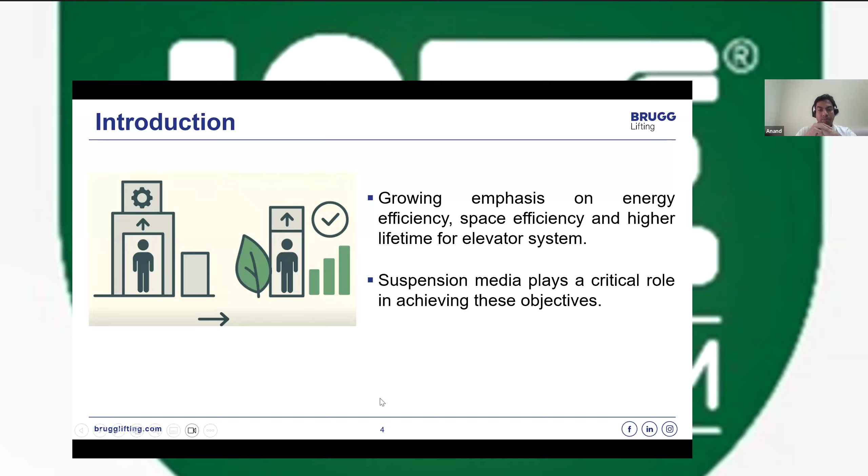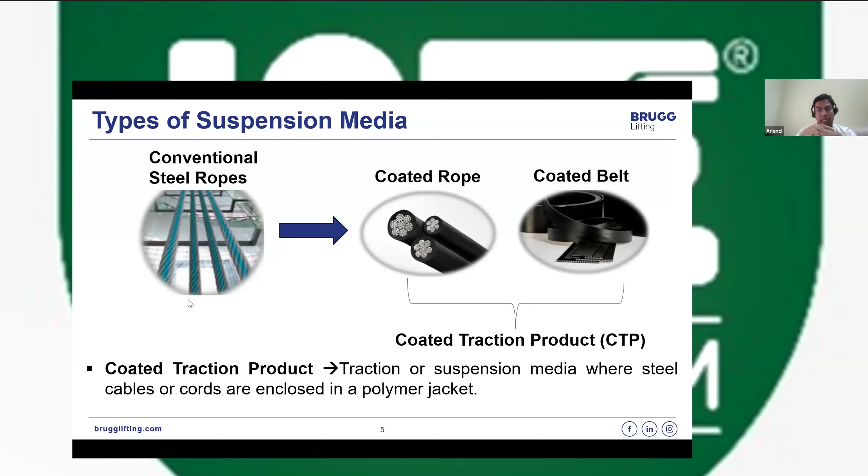We can move on to the next slide. Here you would see how the suspension media can optimize elevator performance. Look at the 2-to-1 typical elevator layout here. The traction sheave would also be a very important aspect to consider for the space required for the elevator. This traction sheave diameter is basically decided by the type of suspension media that we are using.

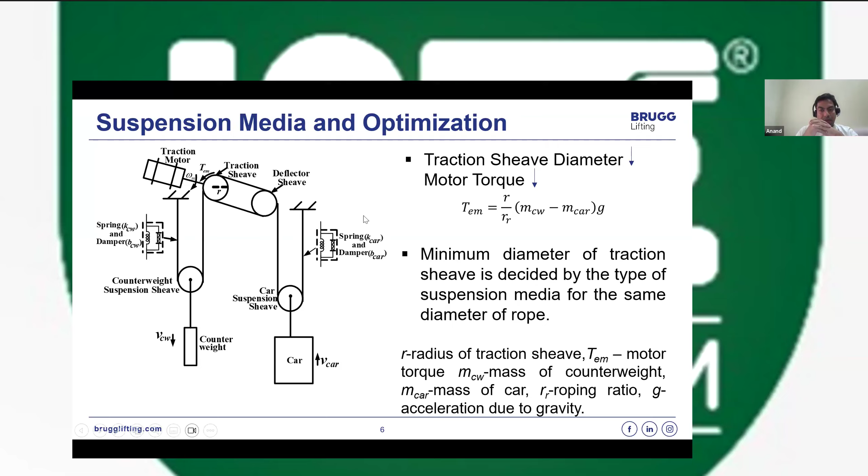So what are the advantages? Maybe we're directly jumping into this topic of the advantages of coated traction products.

As I said in the previous slide, the diameter of the traction sheave is basically decided by the suspension means that we are using. When you use the coated traction rope, we can go as low as 25 times the diameter of the steel rope inside the polymer jacket. In case of belts, it's 40 times the diameter of the steel cord inside the polymer jacket. So if you take a typical rope of 8mm, 40 times the diameter of the rope is what should be the diameter of your traction sheave. It's 40 times 8, so 320mm should be your diameter of the traction sheave.

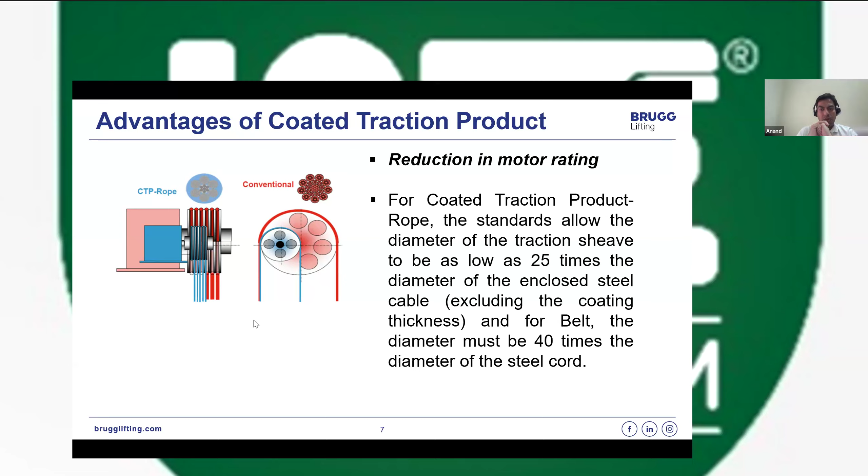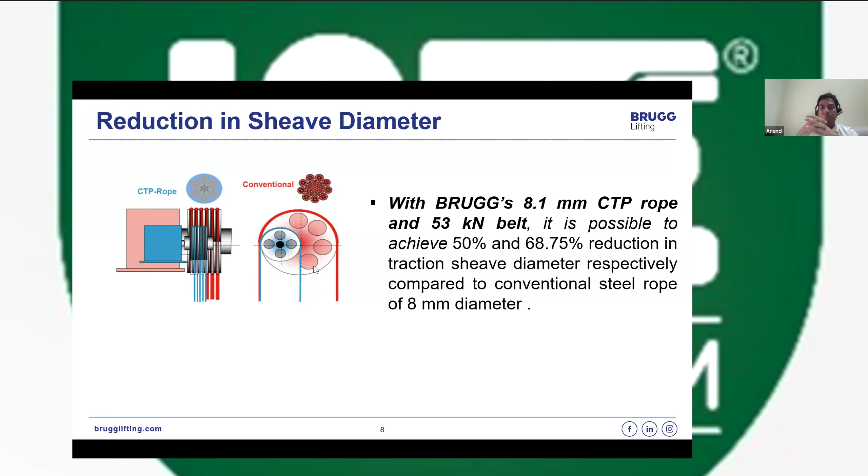Whereas if we go with, maybe in the next slide we'll talk about, the 8.1 diameter typical rope that we have, the coated traction product. Sriram, we can go to the next slide. If we have the 8.1 CTP rope that's more popular in the Europe market, when we compare it with 8mm diameter, the diameter of the traction sheave is actually 50% less, and when compared to the traction sheave required for the 53 kilonewton belt, it's 68.75% less diameter required compared to the 8mm steel rope. That itself tells you how much space you can save in terms of overall space required for a given elevator configuration.

And apart from the space saving from reducing the diameter of the traction sheave, we also see high traction capability, because the coefficient of friction at the interface between the suspension means and the traction sheave is between the steel and the polymer material we're using. Whereas in typical steel ropes, it's always steel to steel contact. Because of this interaction between the steel and the polymer coating, the coefficient of friction between these two is very high, and that gives you better traction capability. This helps reduce the cabin weight, or rather, for a given passenger capacity, you can have the smallest, lightest cabin weight which would accommodate the same passenger capacity you'd like to have.

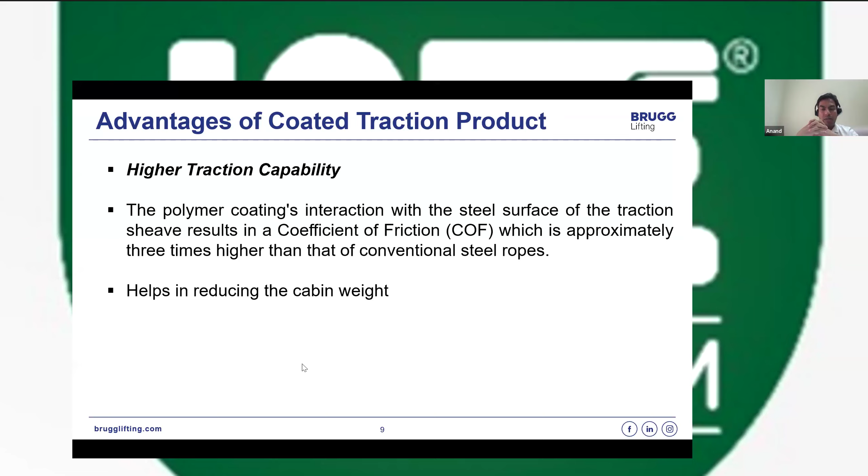So maybe Sriram, from here, from the traction calculation onwards, you can take over. Yes, sure. Can you hear me? Yes, you can. And thanks, Anand, for the nice introduction about the coated traction products.

Now let's dive a little deeper. Let's try to understand the technical aspects of the coated traction products and what is the difference in terms of technicalities between a conventional steel rope and the coated traction products. Whenever we select any traction media, the first thing we have to ensure is how much traction it gives and whether that traction is sufficient or not. There are certain conditions in which you need the suspension media to slip, and certain conditions in which it should not slip. The standards have defined that, and we need to ensure we follow that.

Here we're just trying to show an example. Let's say you take a system with a payload of 400 kg and an empty cabin of 750 kg. If you assume a balance factor of 50%, your counterweight will be 950 kg, in a 2:1 system with a height of 25 meters and safety factor of 12. So you need 3 ropes, and this is like a typical low rise, low duty elevator system, a residential elevator system. Now when we do the traction calculations, we try to compute the tension ratio T1 by T2, T1 for the car side and T2 for the counterweight side. We have to ensure that even at 125% of the payload, the traction suspension media doesn't slip. So the T1 by T2 ratio is fixed once we fix this system, once the payloads and everything is fixed.

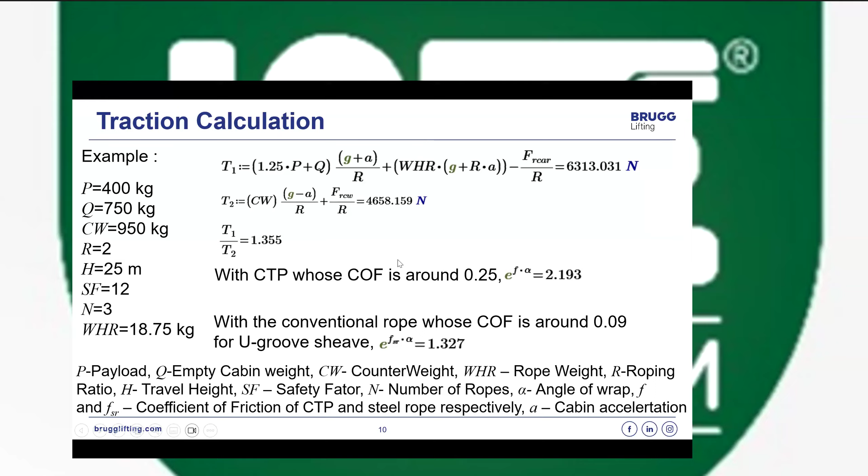Another advantage is, as Anand mentioned, when you talk about the coated traction product, you have a polymer coating outside that's going to interact with the groove, which is steel. So it's not a steel to steel contact. What you are going to have is a polymer to steel contact. But conventional rope is steel to steel.

So generally, you face noise issues due to this steel to steel interaction. But with the coated traction product, due to the fact that the polymer is interacting with the steel, the noise level comes down. Also, this polymer coating provides additional damping to the system, which may become an important factor when you talk about vibrations and noise. For example, if you have a resonance that you want to avoid, this polymer coating is really going to help because it provides additional damping.

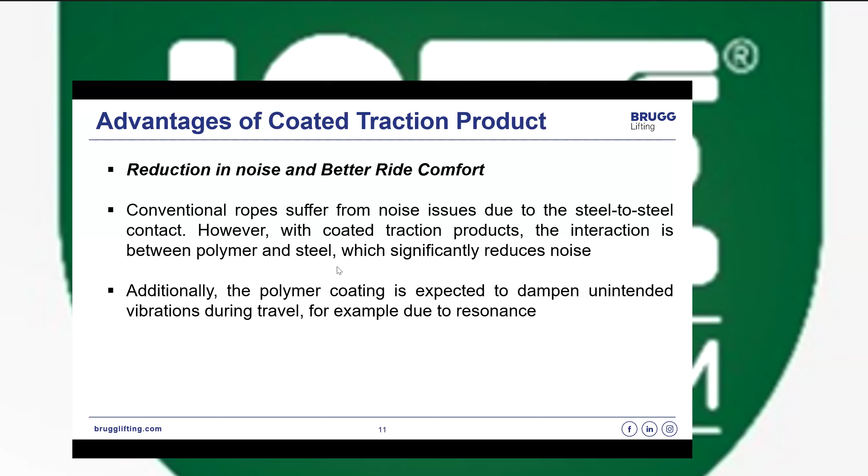So what really happens is, when you have these kinds of natural frequencies in the system, when you design a system, we try to generally avoid these frequencies. If you have worked on system design and configuration, or if you are from the drive or control side, we always try to ensure that we don't operate near these frequencies because we want to avoid resonance.

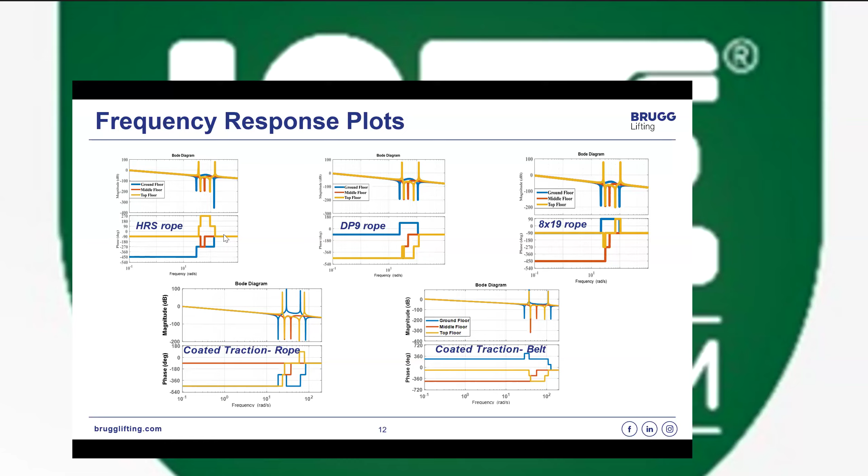It's not like we are trying to say coated traction products are a replacement for conventional rope, nothing like that. Conventional ropes have their own advantages in their specific application segment, but coated traction products have their own advantages in their specific segment. So we need to be really careful in selecting the suspension media. That's the purpose of showing these plots.

Another point is, as I mentioned, since you get higher traction inherently from coated traction products, you can just use a U groove. You don't need a V groove, which you need with conventional rope. Now what's the advantage? The lifetime of the suspension media increases.

When you design an elevator, you want it to last at least 15 to 20 years. But the rope may fail in 6 or 7 years. Replacing the rope is a cumbersome, time-consuming process - the elevator has to be put out of service, which is always a problem for customers. So we always want the suspension media to last as long as possible; the lifetime should be better.

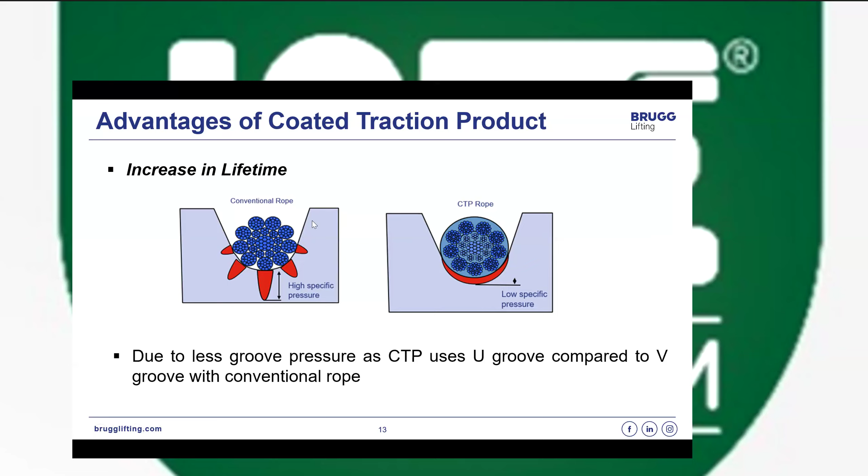To achieve that, going for a U groove is better for the suspension media. You can see on the right side we've shown the U groove. The groove pressure on the outer strands of the rope is less with a U groove, since it's a round groove. But with a V groove or undercut U groove, you get pressure points because it only touches at one particular point, putting pressure on the outer strands. As the elevator keeps running, this additional groove pressure brings down the lifetime of the rope. That's also an advantage with the coated traction product, since we use only a U groove - you get a better lifetime.

We've shown an example here. This SCX9 is our conventional full steel core rope. Let's take that - it's a conventional rope, full steel core, 8 mm. As per the standard, you should have 40 times the diameter of the rope, so 40 into 8 equals 320, which should be your traction sheave diameter. But if I go for an 8.1 mm CTP rope, I can reduce my diameter to 160, and if I go for a belt, I can bring it down to 100. This is because the standards allow you to go 25 times the diameter for steel.

In the coated traction product, though the diameter is 8.1 mm, if you exclude the coating, the diameter of the steel cable is just going to be around 6.4 to 6.5. So we multiply that by 25, and we can reduce the traction sheave diameter.

When you talk about the belt, the steel cords inside are just around 2 mm. So 40 times 2 mm is around 80 mm. But generally, to have a better life, though we can go up to 80 mm, we keep it as 100 mm.

So you can see clearly there is a big difference in the traction sheave diameter, which means for the same payload, the torque rating of the motor comes down, because torque is nothing but the cross product of force into the radius of the traction sheave. When the diameter decreases, the radius also decreases, so the torque rating comes down, which means the motor size comes down and the initial cost comes down. So you get better energy efficiency and a compact motor.

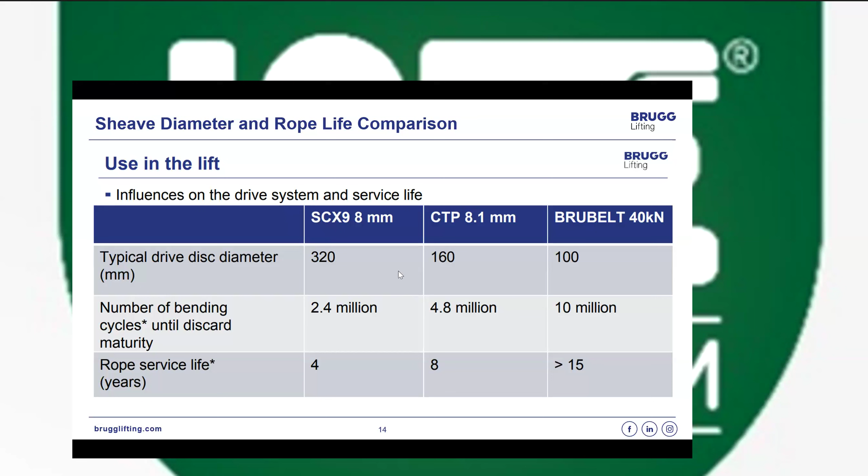Another advantage, in addition to energy efficiency from reducing the traction sheave diameter, is that for the same hoistway you can increase the size of the cabin. If you use a conventional steel rope, say a 10 mm rope, 40 times means you need a traction sheave diameter of 400 mm, but with a coated traction product I can bring it down to 50% of that - a 200 mm traction sheave diameter. So you gain this additional 200 mm though the hoistway is the same.

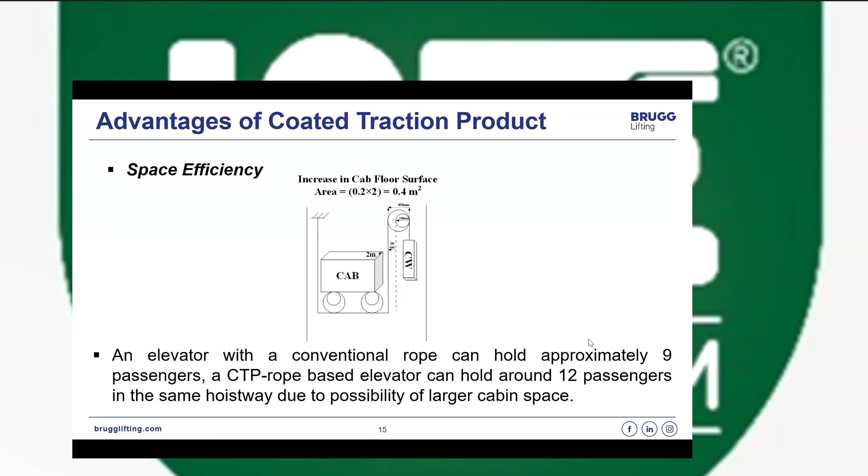If I optimize it intelligently, I can use that extra space to increase the cab floor space, accommodating more passengers. For example, if a conventional rope elevator holds 9 passengers, a CTP rope based elevator can hold more, maybe around 12 passengers, due to the larger cabin space.

Another cumbersome thing with conventional rope, especially fiber core rope, is that you need periodic lubrication. But with coated traction products, that need is eliminated, which brings down your maintenance. Not only that, it also keeps the hoistway clean.

We've heard in some expositions complaints that with fiber core rope, especially at high speeds, the lubrication starts coming out and makes the hoistway dirty. It makes the sheave dirty, makes the groove dirty, and also affects the friction, so traction comes down. But with coated traction products you won't have any of this problem, since you don't need periodic lubrication - you get smooth operation once installed.

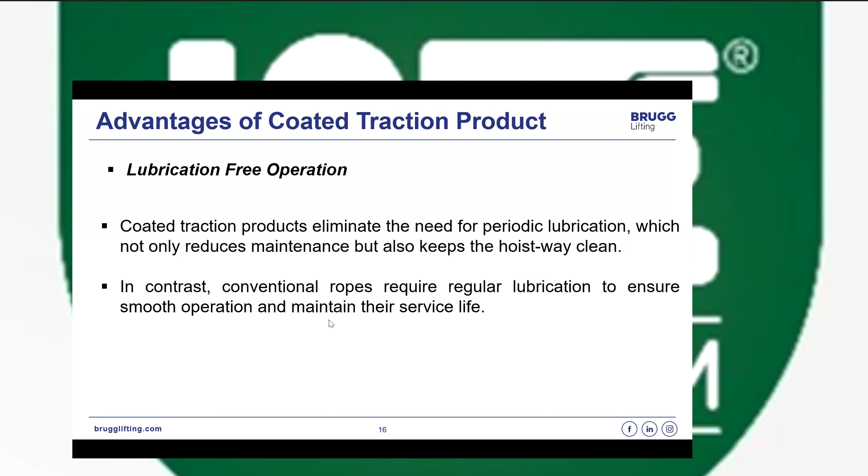Sustainability, in terms of production, not the operation of the elevator - if I have to produce a full steel core rope, a CTP rope, or a belt, the CO2 emissions from production differ: steel core rope has significant CO2 emissions, CTP rope brings it down, and CTP belt brings it down further.

And of course, if you try recycling and use renewable energy, you can further significantly bring down your CO2 emissions.

This also aids you in ensuring that right from the beginning of the rope till the usage of the elevator, the overall CO2 emission comes down, which means it contributes towards sustainability, because nowadays government regulations are forcing towards sustainability due to the greenhouse gas effect and global warming. So we need to ensure that every component we use in the elevator contributes towards sustainability, and in that aspect, compared to your conventional steel core rope, the CTP rope and CTP belt perform better.

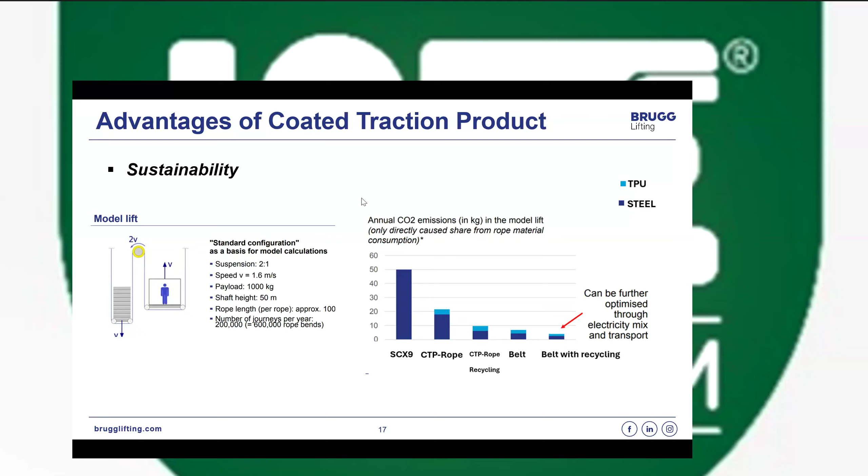And of course, engineering teaches us that you can't get everything. It's not like you can always keep having only the advantages. Now what is the pain point, we need to equally understand that as well, because to exploit all the advantages mentioned so far, you need to ensure how to install these coated traction ropes. It's not like a conventional rope.

We have enough experience, the market is quite mature. But when you talk about the coated traction rope, since you have that polymer coating outside, you have to be really careful while installing this coated traction rope. These coated traction products are sensitive to lubricants, fats, oils, and similar substances. So your hoistway has to be really clean. There should be no moisture contact with the CTP.

And the fleet angle, which is the angle between the traction sheave and the rope when it comes out of the traction sheave, that has to be less than plus or minus 0.5 degree. Otherwise, an excess fleet angle may rupture this polymer coating, and your sheave geometry and properties should meet the specifications specified by the manufacturer.

For example, the roughness of the traction sheave - let's say you take our belt, we specify what the roughness of the traction sheave has to be. So you have to ensure that that roughness is maintained. Otherwise, you don't really get that performance.

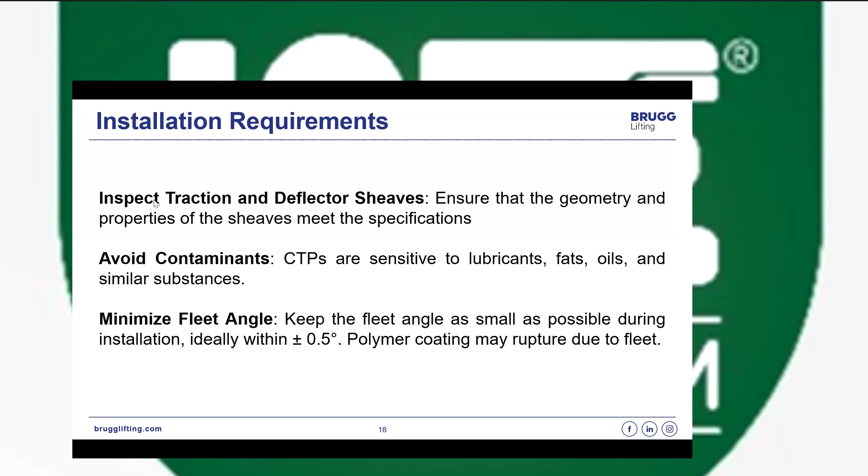Sometimes you may start facing some noise issues, not because the belt is creating the noise, but because the sheave being used is not really compatible with the rope, with the belt or the coated traction rope that is being used. So you always need to look at what the manufacturer specifies for the traction sheave in terms of geometry, in terms of roughness. We have to ensure we maintain that.

And we need to ensure there should be no twist. The rope should be untwisted both before and during installation, and you cannot allow any reverse bending of the rope, because again this will damage the polymer coating.

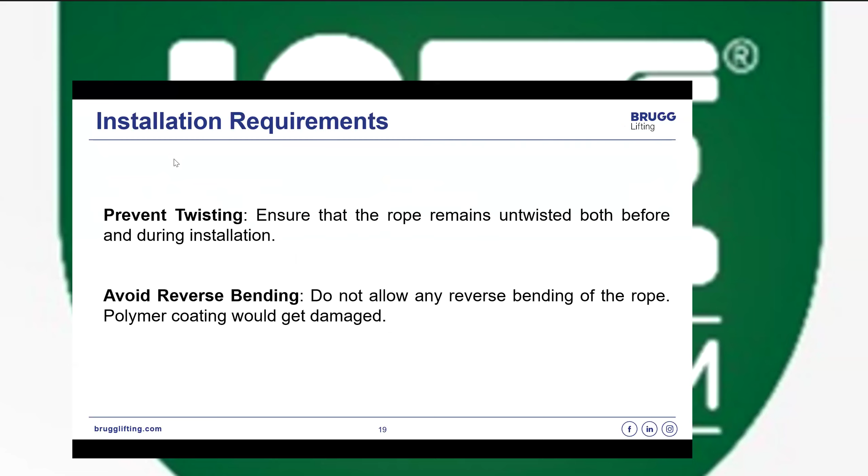Now coming to the simulation - why we have done this is just to show how much reduction in the current rating you can get, because we mentioned that you can bring down the torque of the motor. But what's the advantage in bringing down the torque of the motor? The cost of the motor comes down because you need less current in the motor, which means the coil and conductors used have to be rated for less current. So that's where you get the advantage with respect to reducing size and also initial cost. And to show that comparison, we have done a simulation.

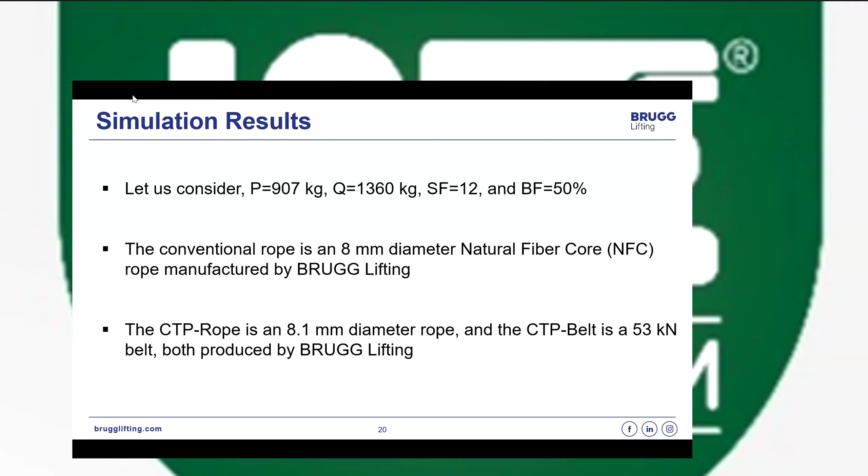Let's say you take a payload of 907 kg passenger capacity and an empty cabin of 1360 kg, and assume a safety factor of 12, which is common. If we take a balance factor of 50%, let us consider this system using a conventional 8 fiber core rope, quite popular in India, and try to replace it with a CTP rope, 8.1 diameter, and also a CTP belt, 53 kilonewton. All three are from Brugg - Brugg fiber core rope, Brugg CTP rope, and Brugg CTP belt. We have taken that as a reference to compare.

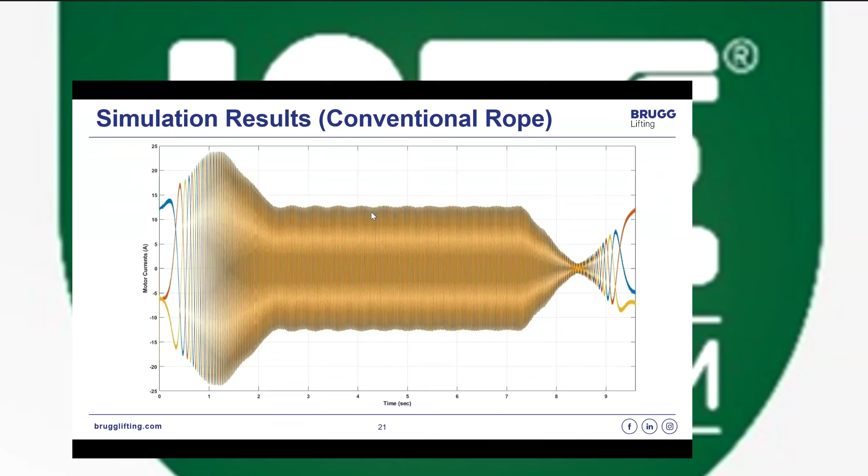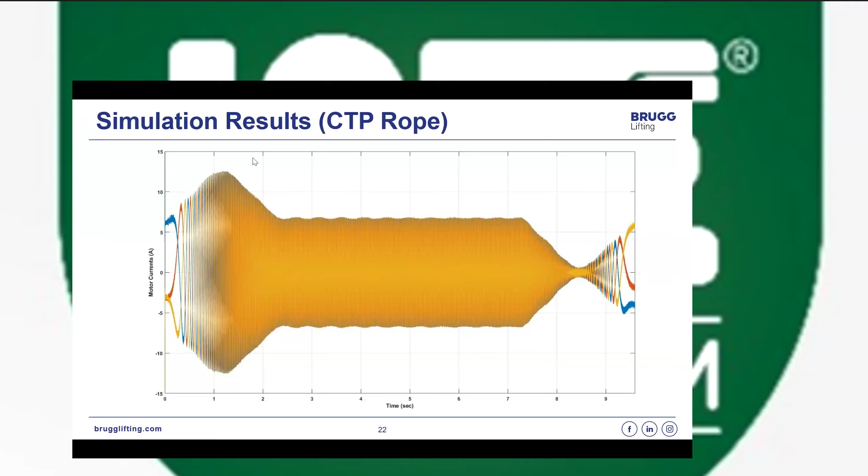With the conventional rope, you can see that when the elevator is accelerating, it goes up to 24 ampere peak current, and when the elevator operates at rated speed, it comes down to around 12 to 13 ampere. With the CTP rope, the peak current has come down to around 12 ampere, and the rated current at rated speed, which we call the rated current with rated torque, comes down to around 6 to 7 ampere. And if you go for a CTP belt, you can bring it down even further.

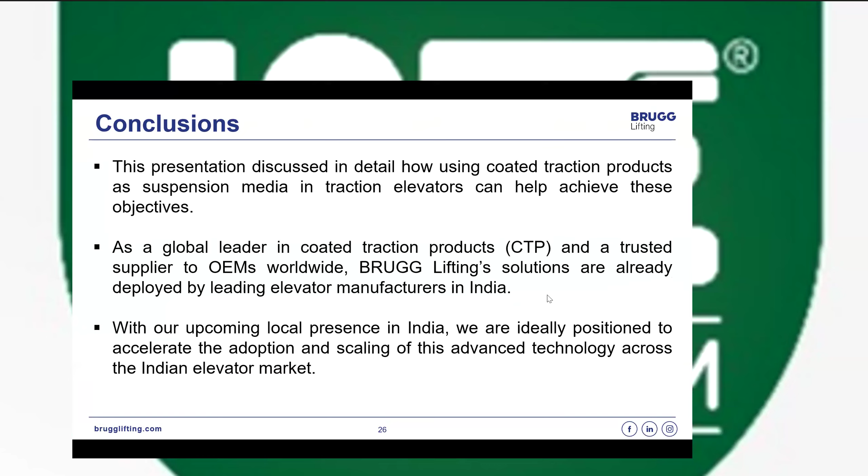This is the plan as of now. We currently cannot exactly say what products we are going to produce in India, but depending on the demand and customer interest, we are always open and ready to include any product which has demand in India.

Thank you, Sriram and Ananda, for the informative presentation. It's good news that Brugg Lifting is launching in India. All the very best for that.

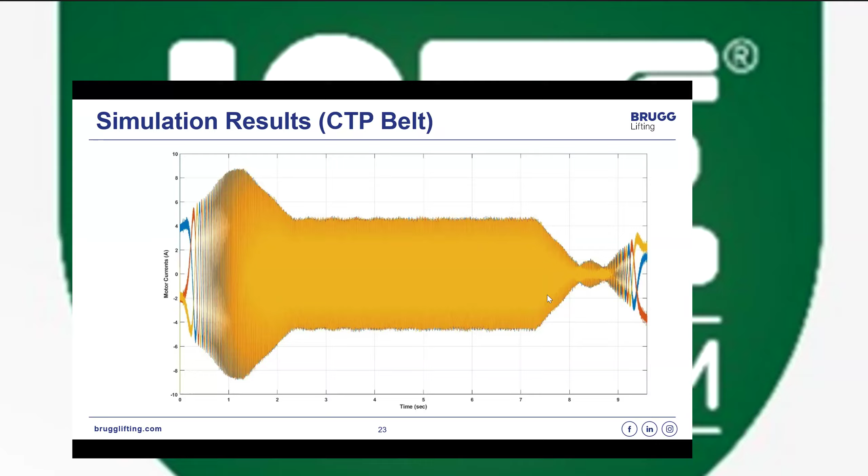Here we have not included the cost. Are you talking about the cost of only the suspension media, or the total cost? Because the cost of the motor also comes down, and the lifetime increases. So ideally we have to look at the total cost of ownership, not only the initial cost.

So here we are not showing that calculation, but of course we can share that we have it internally. We have done a total cost of ownership analysis for a given elevator system, and I don't have that exact number right now.

Maybe he can connect with you later to discuss this. That's what I would recommend, because this cost comparison cannot be a single number. It varies from configuration to configuration. There are different parameters that come into play: the passenger capacity, travel speed, travel height, and the configuration for which we are doing the comparison. So it's not a straightforward number that we can share.

But if you're looking for any specific elevator scenarios, you're free to contact us and we can discuss further. Let's say if you take a conventional rope, it comes for 5 to 6 years, and after that you have to replace it.

So there is a replacement cost, you have to buy the rope again, and that cost also comes into the picture. So we just can't look only at the initial cost. You have a replacement cost, then downtime cost, and everything.

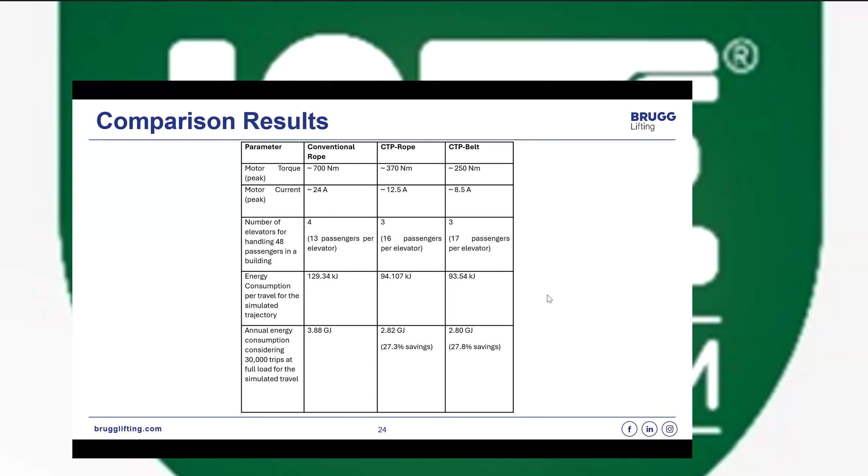But here it comes for 10 to 15 years. So we look at the total cost of ownership, and we have analysis to show this, and we will be happy to share that. Maybe you can share your contact details so they can connect with you. Can we move to the next question?